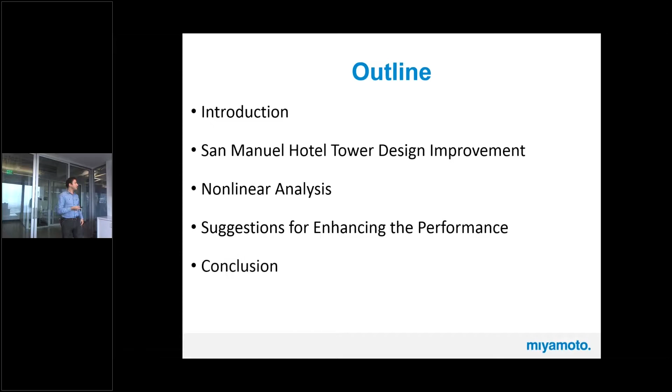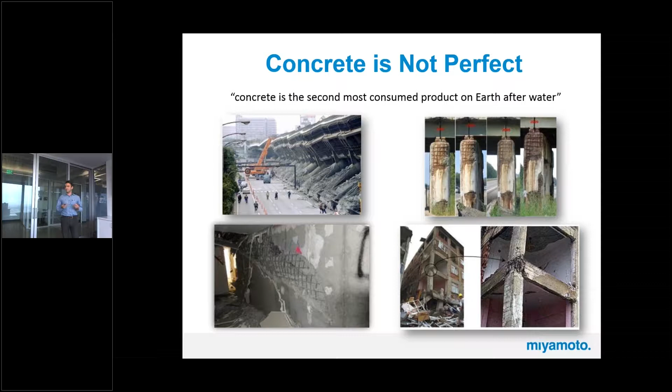So you may say, what about code? Code provides the minimum requirements to save the life of residents and never guarantees a safe structure. So a code-based design structure may experience severe damage during an earthquake, and you may need to demolish it after that. The whole purpose of the code is saving the life of the residents.

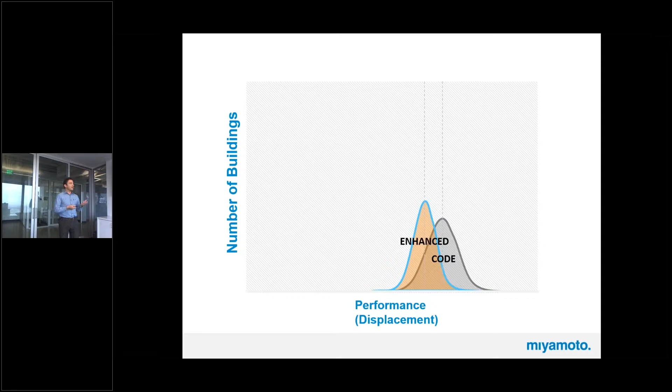Most probably you're familiar with this graph. As mentioned, code only provides the minimum requirements, and there is a lot of uncertainty in the code. Using high performance materials, and fiber reinforced concrete is categorized in this range, you can reduce the uncertainty. But to improve it and have a better structure, you need dampers and base isolators, but certainly they require higher investment.

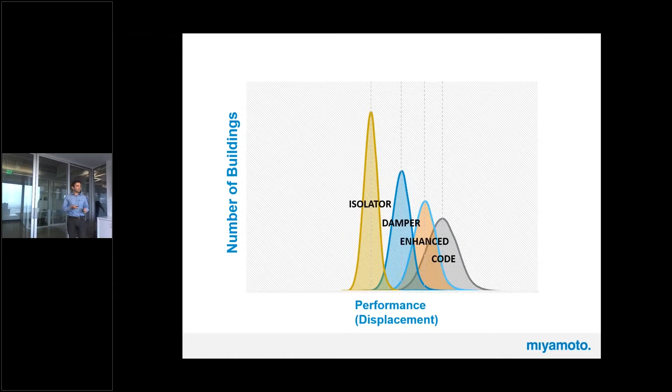So fibers can help. Using fiber in concrete is not a new concept. Ancient cultures used it in mud bricks to control cracking. Mud, they didn't have concrete at that time.

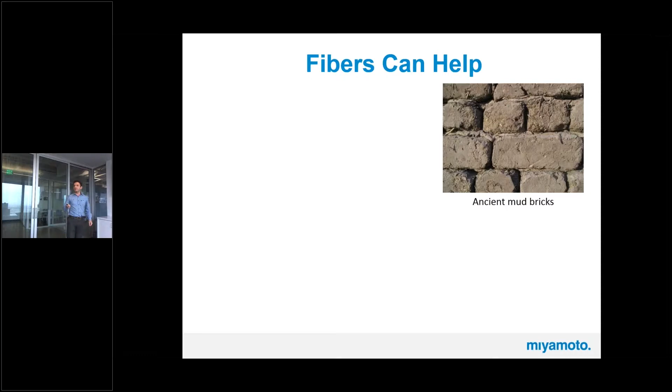So what do fibers do? Fibers first control the crack width in the concrete, it limits the crack width. This is a special type of fiber reinforced concrete, and you can see it can generate thousands of cracks, which is good for the permeability of the structure. So if you have less cracking with limited width, you enhance the service performance of the structure.

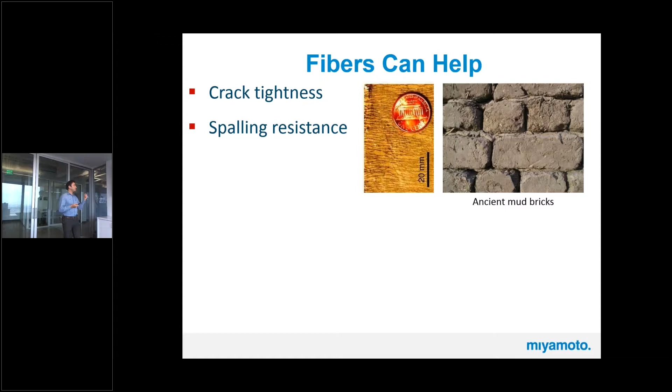And if you have better shear resistance, and you can provide a kind of self-confinement to the structure, it improves the energy absorption capacity of the building. The other thing is fiber reinforced concrete improves the bond. If you have a better bond between concrete and reinforcing, you expand the plastic hinge region. You would have a bigger plastic hinge, so you would have less concentrated damage, and higher energy absorption capacity in the structure.

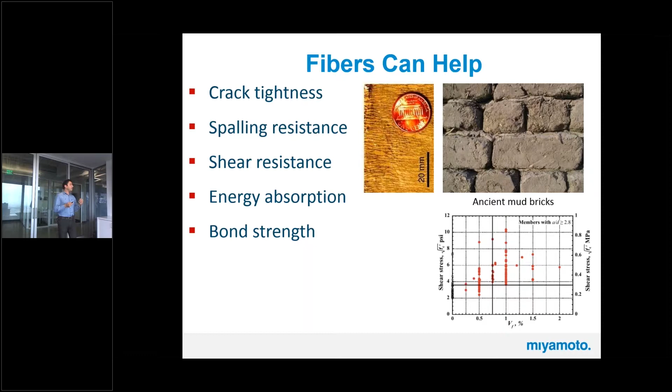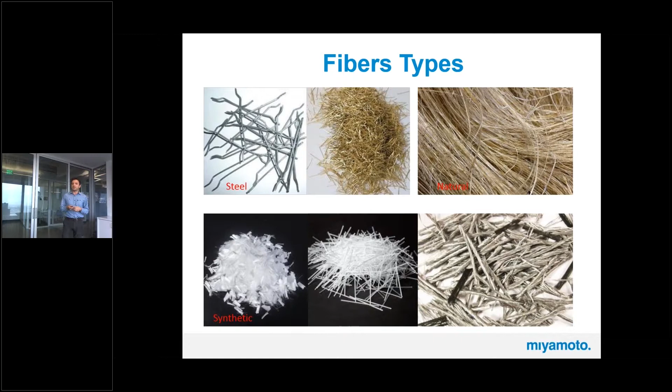For flexural dominant structural elements, fiber reinforced concrete mainly improves the damage tolerance of the element, so you would have a higher number of cracks with limited width. But for shear dominant structures, it changes the failure mode of the element, because fiber reinforced concrete is more ductile and prevents brittle shear failure. Additionally, it increases the shear strength of the system.

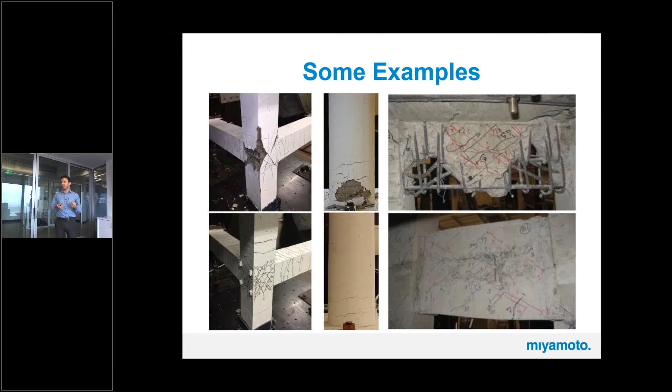So having this information, I would like to talk about the case study. It was an 18-story tower with 3 shear wall cores and also post-tensioned slab.

You can see a little unsymmetric plan and also elevation in the structure, and it was designed based on the code. Our purpose was to respect the code, to design the building in a way that satisfies every requirement, and at the same time add fiber reinforced concrete as a supplement and improve its behavior in MCE level, in extreme earthquake event.

So the first design, after talking with the peer reviewer, we figured out that the structure is too stiff. What does a stiff structure bring with itself? First of all, it absorbs more energy during an earthquake, and additionally you would experience much higher acceleration at top, so it amplifies the ground acceleration. FEMA predicts, as a rule of thumb, that acceleration at top floors amplifies by 3 times compared to the ground motion.

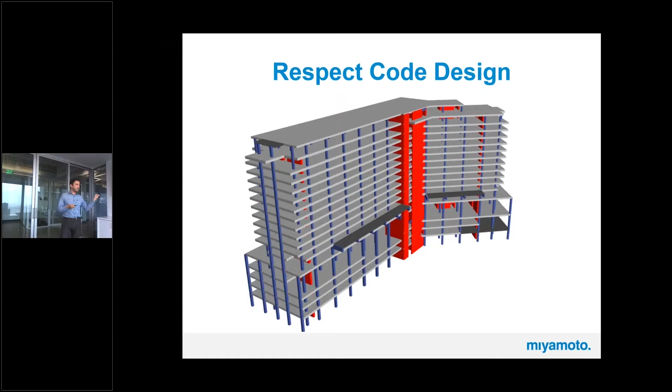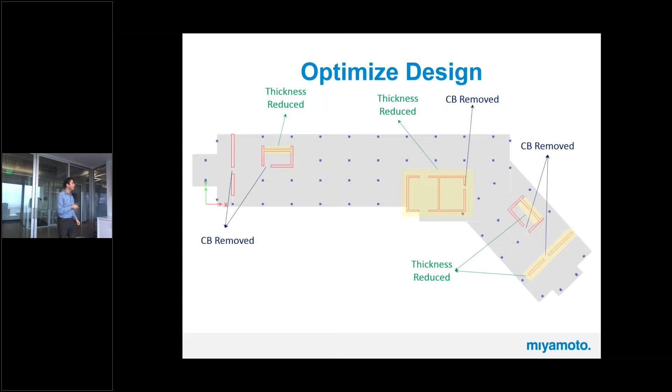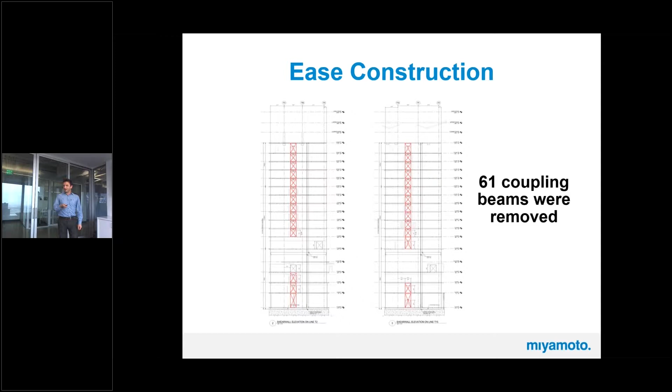So to reduce the stiffness of this structure, we removed the coupling beams and reduced the thickness of the shear walls strategically in different locations to satisfy the code requirements about torsion and drift. By doing that, we removed 61 coupling beams. The contractor got so happy, the owner got so happy. And then we told them that we reduced 1,100 cubic yards of concrete use in the shear walls, and they got happier.

So by doing this, I believe we saved around $1 million in construction cost by just tuning the building.

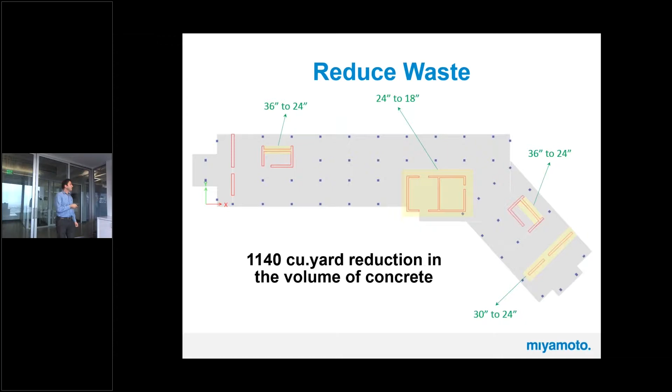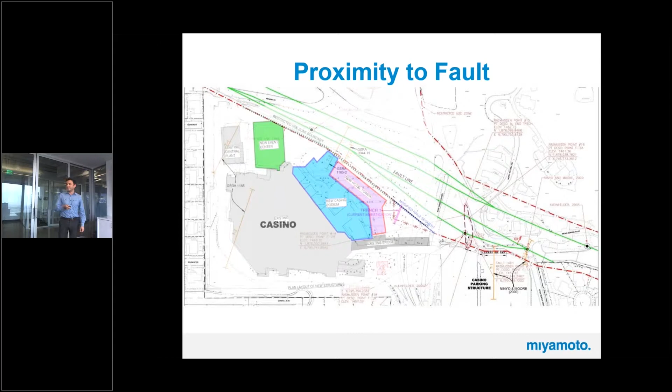Okay, so the next step, we performed some nonlinear time history analysis on this structure using the site specification. This structure is located pretty close to a major fault, around 50 feet actually, it's pretty close. And the site-specific response spectrum shows that we would have around 30% more acceleration compared to the design response spectrum.

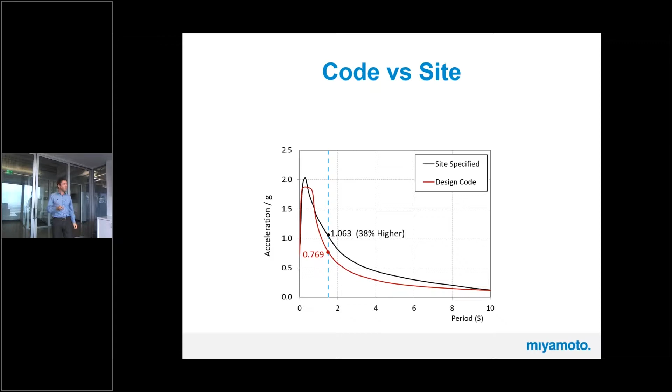This is one of those uncertainties I mentioned earlier about uncertainties in the code. Without this investigation, you wouldn't understand and you wouldn't know that you would experience higher acceleration on site. So based on this information, the geotechnical engineer gave us 7 time histories, perpendicular and parallel to the structure, and these time histories need to be applied simultaneously to the structure.

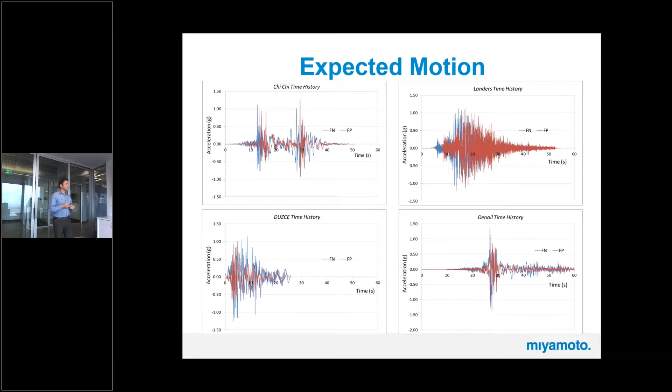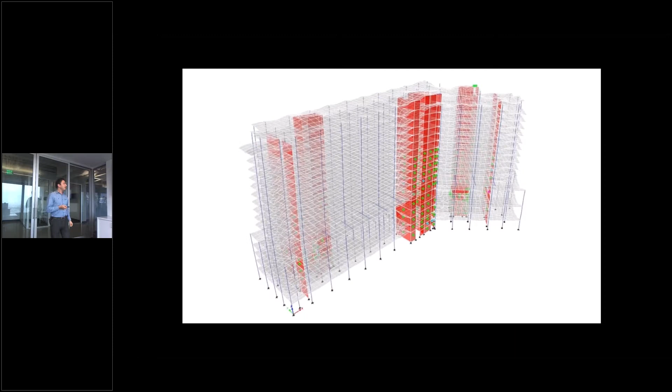And those colored circles show the location of the plastic hinges. Here you can see how plastic hinges form in the walls. Most of the plastic hinges are concentrated in the lower 3 floors, and after the 6th floor, where we have a spandrel.

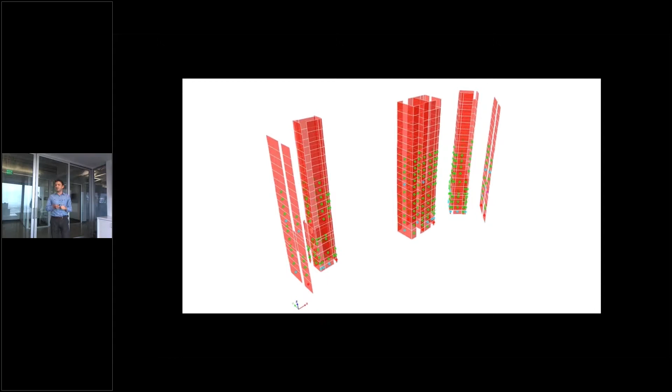After that giant spandrel, the stiffness changes. We could eliminate that one too, and I asked the architect to give me 3 inches more for the west wall, so I could increase its thickness by 3 inches. They disagreed, so we had no choice but to leave that spandrel.

Looking at this slide, green means good, not that bad, blue is the next, and red is the worst. As you can see, most of the red dots are in the bottom 3 floors and also in the wing shear walls. Those are very important for us in this building because they were controlling the torsion of the structure.

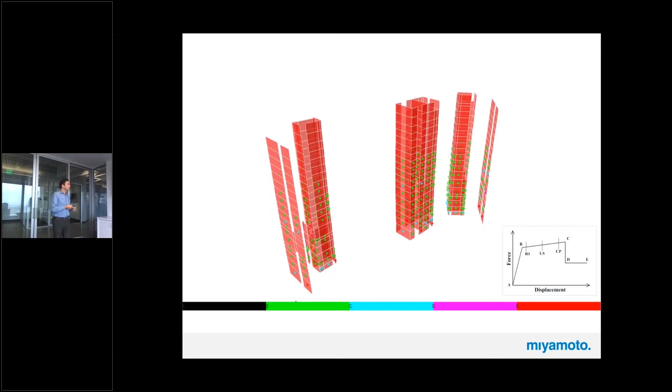So in addition to the location of the plastic hinges, we also measured the drift and also acceleration in all 7 time histories and averaged them for both MCE level and DBE level design, to be sure that they are within the limits. As you can see here, for DBE level, they're within the limit of 2%. And for acceleration, you can see that it didn't amplify that much.

Because the structure was soft, the amplification in higher floors was around 1.5 times. For comparison, in Wilshire Tower in Los Angeles, the acceleration amplified around 2.5 to 3 times in the higher floors.

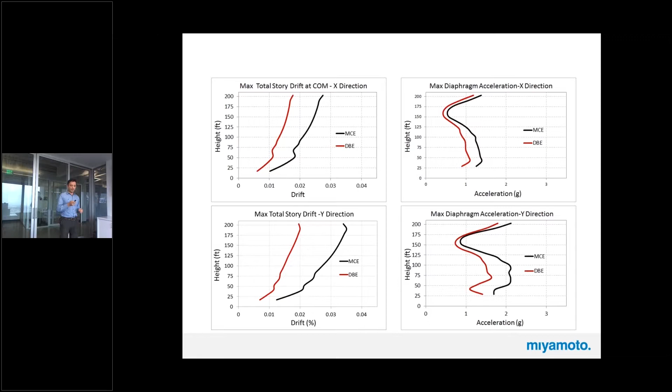And also we measured the strains in the concrete and reinforcing steel. This is one of the examples. We did that for all the shear walls and in the height, and also for all 7 time histories, and then we averaged them. We wanted to see where we passed the limit.

The limit for concrete is 1%. This is one of the cases where in MCE level, the strain passes 1%, but in DBE level, we are fine, as it was based on the code. But we want to improve the performance of this structure for an extreme event, which is MCE level. So we identified the location of the concrete that has major damage, like crushing and spalling.

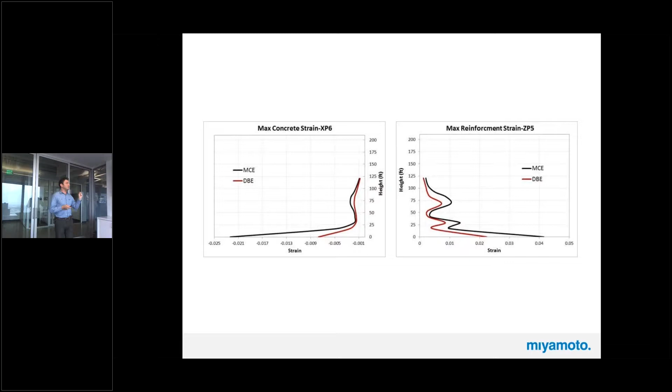We adjust the amount of reinforcement in the shear walls to have strains less than 5%, which is the limit for MCE level.

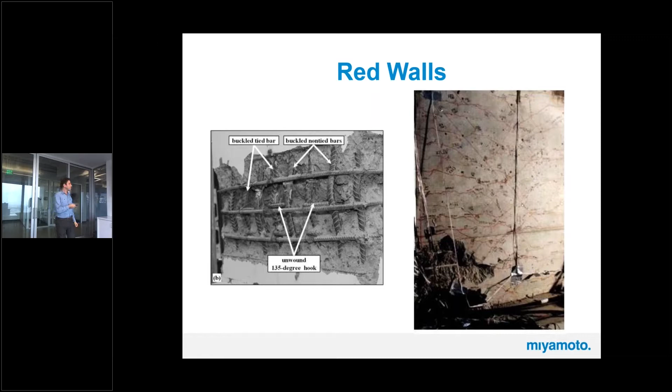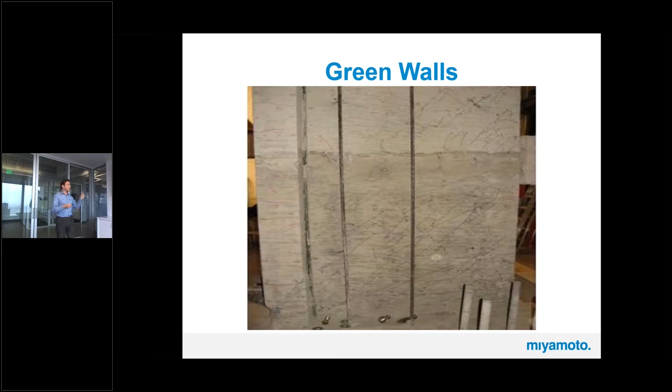To better understand what the red and green dots mean: in walls colored red, we expect spalling and crushing in the concrete, followed by buckling of the reinforcement, and huge cracks at the bottom, mainly in the boundary elements. In the green ones, the reinforcing yields and you get cracks, but not major ones—more like normal cracks along the wall. So we have the location of the damage and we know what happens to the shear wall, and we know that concrete crushes.

We don't want to invest too much in dampers or isolators. Fibers are one of those options where with minor improvement, you can get higher returns.

So we specified steel fiber reinforced concrete. Based on the literature and also our own investigation about the performance of structural elements with different dosages of fibers, we specify 100 to 130 pounds per cubic yard of concrete. These steel fibers are directly added to the concrete on site and can be pumped—that's one of the major concerns of the contractor—and they can control cracking in the shear walls, enhance concrete deformability, and increase concrete shear strength.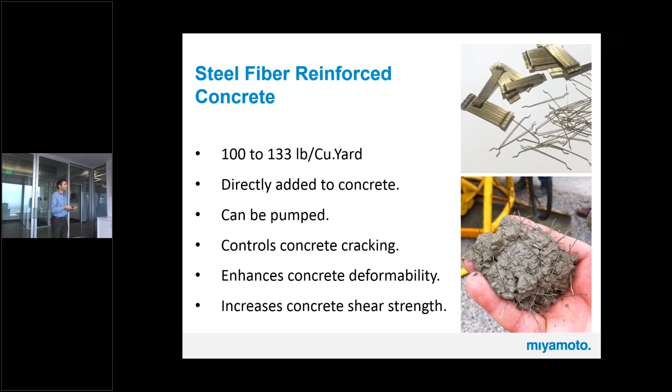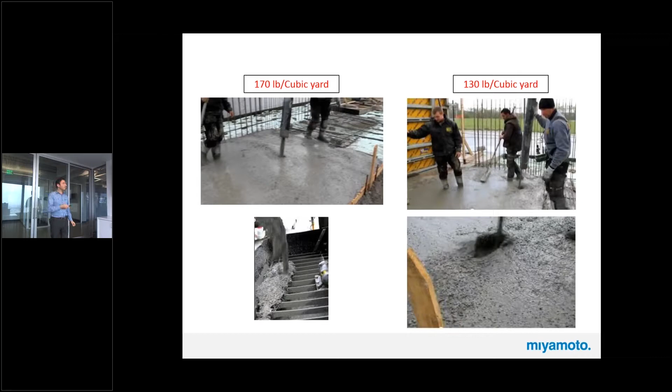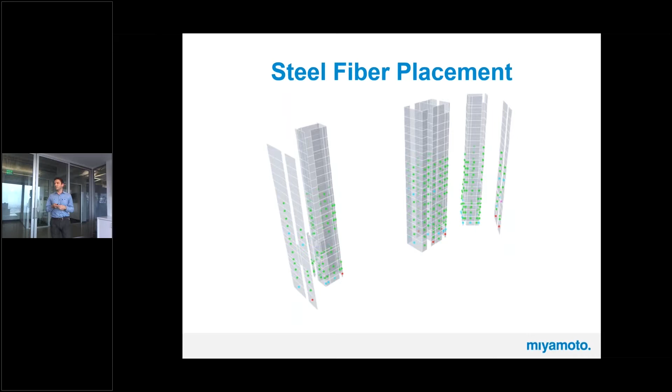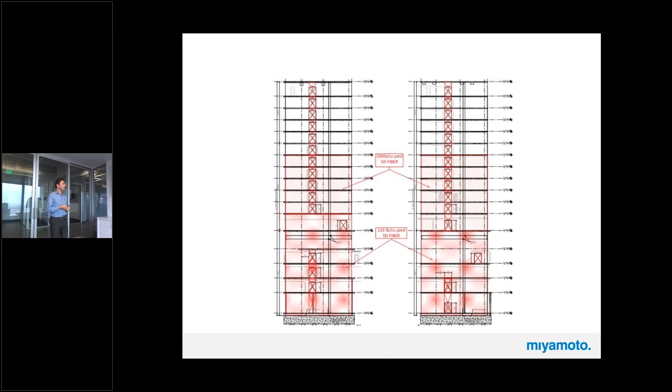Having this information, we didn't want to specify the same amount of fiber everywhere, because we wanted higher dosage in places experiencing higher damage. For example, these are the wing walls that were important to us, so we specified a higher dosage of fibers for the first five floors and a lower dosage for the upper floors.

You may ask, how much does it cost? Fiber itself is not expensive. For the whole building, we calculated it's around $1.20 per pound, and the total fiber cost would be around $230,000. It does reduce the slump a little bit, so you need to add some high-range water reducer to the concrete, and you need more effort for pouring, but fiber itself is not expensive.

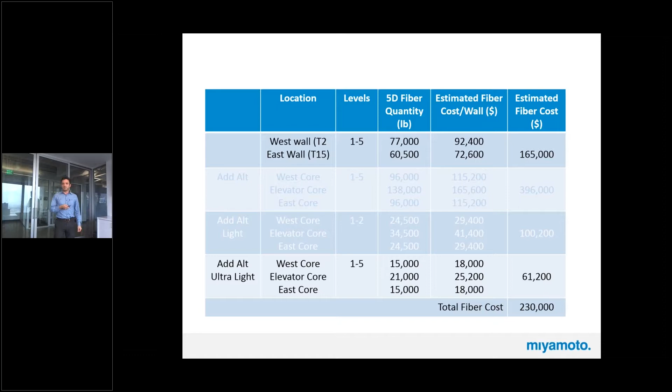With a low amount of fiber, you can reach high performance in this structure.

So what can we conclude from this project? In general, fibers control crack widths, prevent concrete spalling, improve confinement in the concrete and structural elements, and more importantly, increase the shear capacity of the walls. We can improve the deformability of structural elements and their ductility by using fiber reinforced concrete, achieve better plastic hinges with better performance, improve the seismic energy absorption capacity of the structure, and in general improve the resiliency of the structure with lower investment.

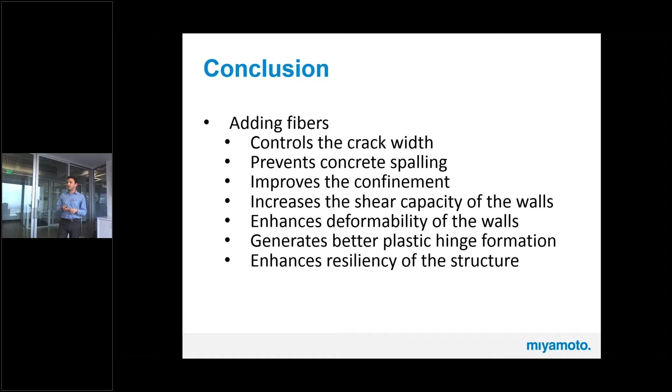You're really talking about a different material when you're talking about fiber reinforced concrete. So I'm wondering how you were able to demonstrate to the peer reviewer what the material properties were for the concrete with the fiber in it. Thanks for the question—Ken's question is about how we can demonstrate the structural properties of the fiber reinforced concrete for peer review, right?

Yeah, a lot of research has been done, and you can find a lot of literature about fiber reinforced concrete, especially for steel fibers. It is also accepted by code, and right now by specifying 100 pounds per cubic yard of steel fibers, you can eliminate the minimum shear reinforcing—so it's already accepted by code, but for minimum replacement of shear reinforcement.